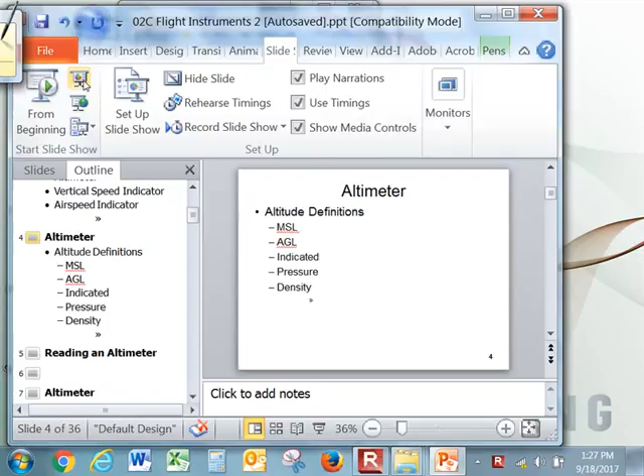Okay, this is section 02. We're on 02. Flight instruments. Is this part 3? Well, the first day it was like 1 minute, right? Right. All right, so it's either part 2 or 3.

All right, let's talk about reading an altimeter. There are up to 3 needles on an altimeter.

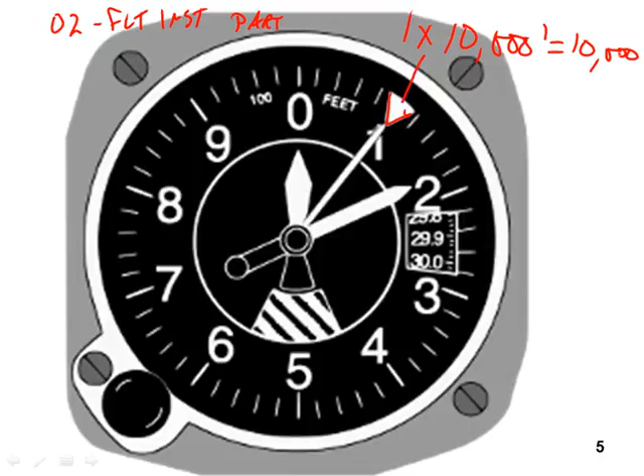First, this one right here is pointing to every 10,000 feet. You'll notice it's right on the 1, so 1 times 10,000 equals 10,000 feet. That tells me that I'm pretty close to 10,000 feet.

Now, if the needle was pointing right here—0, 2, 4, 6, 8—if this triangle was right here, that would tell me I'm pretty close to 8,000 feet. But that's just an estimate.

Then this needle right here is telling me how many thousands. You notice in this case it's pointing to 0. So this triangle is pointing to 10,000, this one is pointing to 0, and then this one is pointing to 180.

So right now this altimeter is indicating 10,180. That's indicated altitude, because no matter what it shows, that's indicated altitude.

But if we had set the Kollsman window to the correct altimeter setting, what would this 10,180 also be? It would be indicated, and if this was set correctly to the correct barometric pressure, then what would this altimeter be telling us? We use that all day, every day as a pilot.

MSL. It's altitude above mean sea level.

How often are we as a pilot going to make sure that the altimeter setting in here is correct? All the time. And as we're flying along on our cross country, how often do we have to set it?

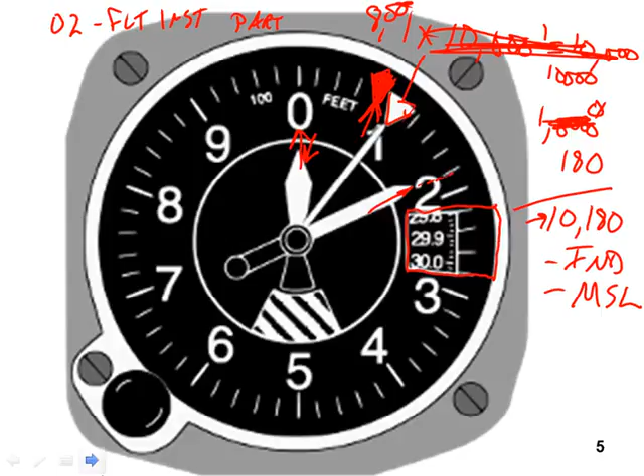You fly to Korea, South Korea, don't fly to North Korea. But if you fly to South Korea and you're coming in off the Pacific Ocean, and you call up somebody in South Korea and start speaking in Korean, they'll talk back to you in Korean. But if you talk to them in English, they'll talk to you in English.

So let's go to the next altimeter. I got another altimeter here.

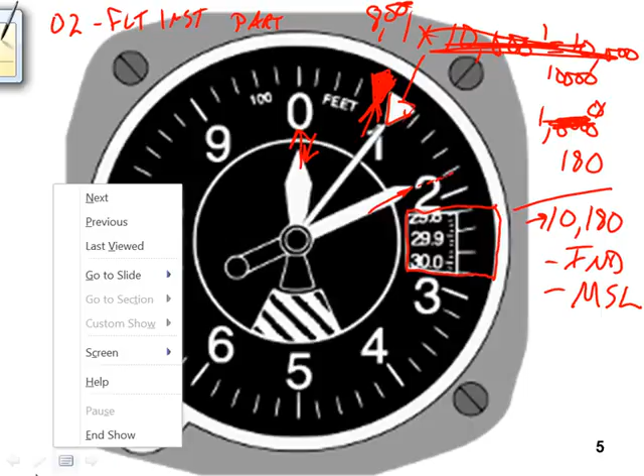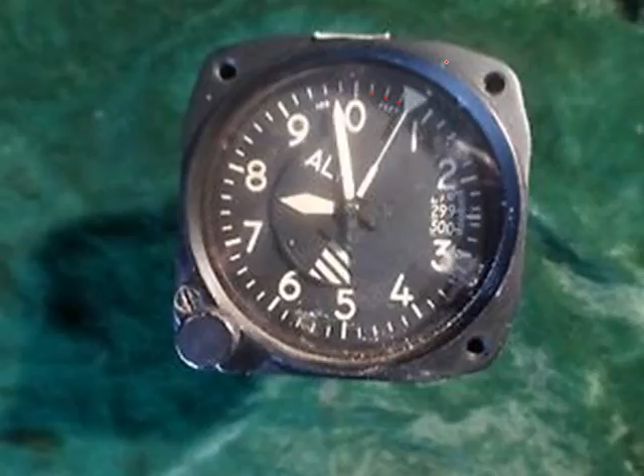So here's another altimeter. You'll notice, here's the triangle - 2, 4, 6, 8 - so that's telling me I'm at 8,000 feet. This medium sized needle is telling me it's 780-ish, almost to 800 feet. This needle right here is off just a little tiny bit. So this is 920, 40, 60, 70, 970. So this airplane's at 8,970 feet.

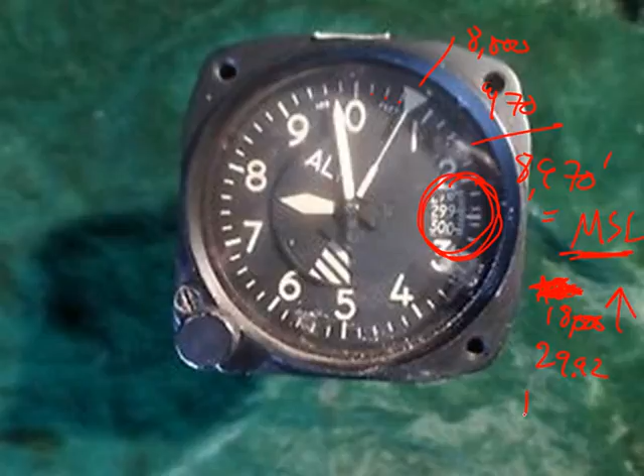And if we have the correct altimeter setting in here, this 8970 is in MSL, mean sea level. So you're going to fly around all day, every day, with one of two altimeter settings. Either you're going to have this set for the correct barometric pressure, and it'll be MSL, or if you're at 18,000 feet or above, you set in 2992, and you're flying a pressure altitude. But everybody else is flying the same pressure altitude - you just might not have your true altitude above sea level anymore.

If you're a jet airplane - we're not going to get into it much in this class - your fuel economy is way, way better above 30,000 feet. There's less air, so there's less drag, so you can go faster for the same amount of fuel you burn. That's why jets don't fly along at 5, 10, or 20,000 feet. They go up past 30. 35,000 is a pretty sweet number. It varies on which jet it is and how heavy you are.

As you burn off a lot of fuel, let's say you take off from Los Angeles, flying to Hawaii. You may take off and your best altitude may be 32,000 feet. It's 5 hours to get to Hawaii, and you're going to burn a lot of fuel. By the time you get to Hawaii, you'll have done step climbs, and you're probably at 35, 36, 37, 38,000 feet by the time you get there. Because every time you notice in your chart that you have a better fuel burn 1,000 feet higher, you call up the air traffic controller and tell them you want another 1,000 feet, and if nobody's up there, they'll give it to you.

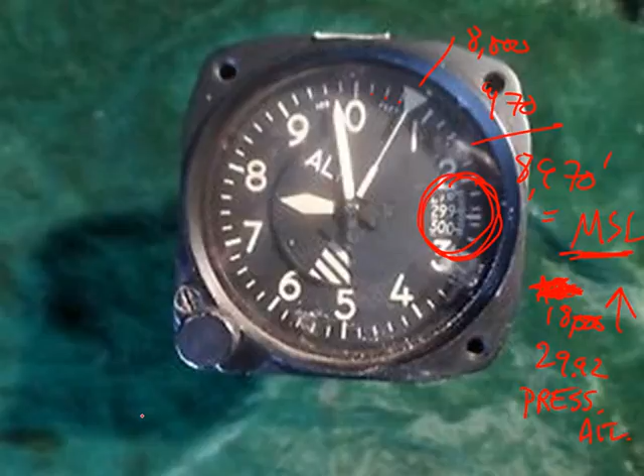But everybody going in that direction is doing the same thing anyway, so everybody knows that's what you're going to ask for. And then at the last minute, you pull the throttles to idle, and you go, woohoo, and then descend. I mean, in the cockpit, you say woohoo. Don't say that - the passengers don't like it when the pilots are saying woohoo. I mean, I don't think they are.

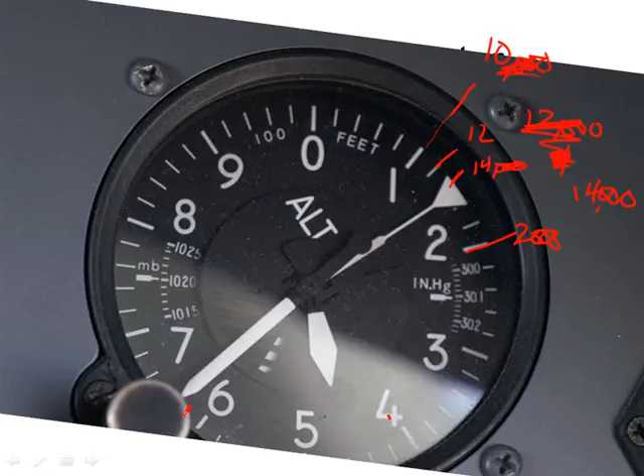This right here is 20,000. So this is 12, and this line right there is 14,000. So I'm going to be at least 14,000, and sure enough, here's the 4, there's the 5 - I'm going to be between 14,000 and 15,000. And this needle is how many hundreds? 1, 2, 3, 4, 5, 6. It's hard to see - there's about 620. We'll say that's about 630.

Again, you notice, look at this case - the altimeter is not set to 2992. You'll set it's at 30. This line right here is at 30.10, but it's really at the next line, so that's actually at 30.12.

Again, I'm not going to try to worry about figuring this out, because when you're in the airplane, you're going to actually spin this knob right here, and this number is going to go up or down. And you'll notice, just for fun, that it says inches of mercury, IN period HG, inches of mercury.

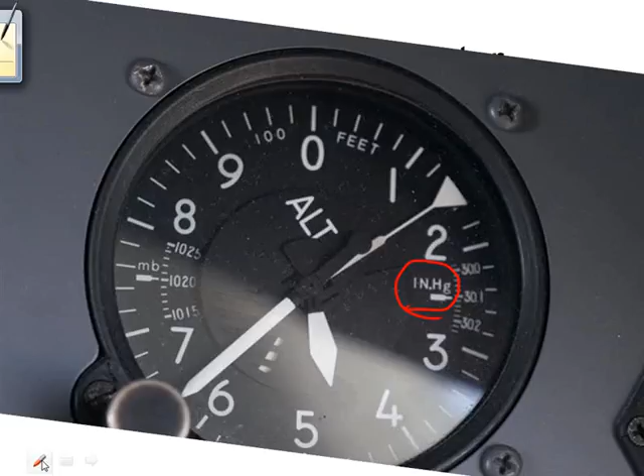Okay, so we played with reading an altimeter.

All right, so next we're going to go into the principle of operation. I'll show you here in a picture: there are some wafers. When I say wafer, this is really just a sealed container made out of brass or bronze, sealed, with 29.92 inches of mercury in it. Whenever you change the pressure on that, it's actually maybe a bellows is a better way to describe it instead of a wafer. Maybe if I show you a picture.

The Kollsman window, that's that window with the inches of mercury that you're setting. There's two L's in Kollsman. It's not Coleman like the camping stove company, C-O-L-E-M-A-N. You don't have to spell that for the test. Kollsman window, I'll have to look it up. I'm guessing it was named after some human.

All right, so the altimeter works off of one pressure, and that's static, off of the side of the airplane. So the only pressure it uses is just one, the static pressure, and that's the outside air pressure.

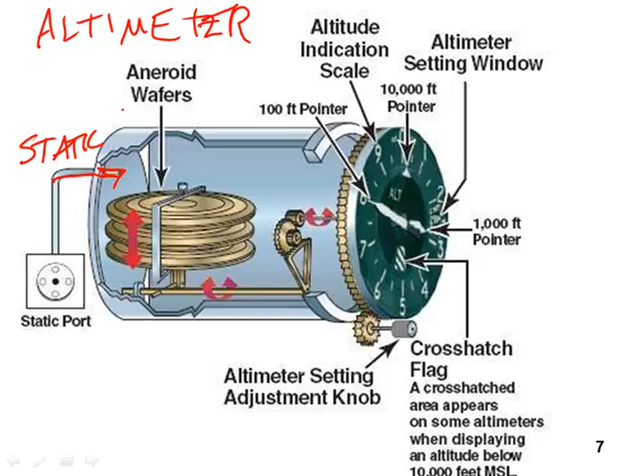So if it was a standard day and the pressure at sea level was 29.92, and you cranked in 29.92 in the Kollsman window with this knob right here, and the outside air pressure at sea level was 29.92, then this altimeter would read 0.

So we'll get back to that shortly. So the air comes in here, but inside these wafers right in here, these are all sealed, there's no holes in them. If the pressure in here gets less, then these are going to try to expand, and it's going to push up. This shaft here is going to rotate. This will move over, it'll spin these gears, spin those gears, spin those gears, and spin all these things.

So I'm never going to ask you to draw this picture. What I am going to ask you to tell me is that inside of the altimeter... oh, okay, Brian's thinking he wants to be able to draw that picture. Okay, bring in colored pencils or crayons. You got to do this in crayon on the test, with all the same colors here. Okay, I guess I could let you use felt markers.

The air inside of these wafers, inside of these discs, inside of these bellows, it's sealed in there. So you got to understand the case, this round cylinder, it's usually painted black, that is this altimeter. Air can't get in or get out of it except to that little tiny hole on the back that goes to the static port. It's not the air pressure inside of the airplane, it's the air pressure inside of the static port from the outside of the airplane.

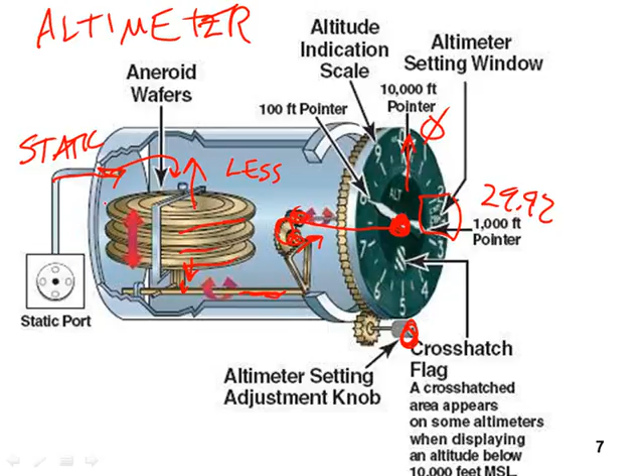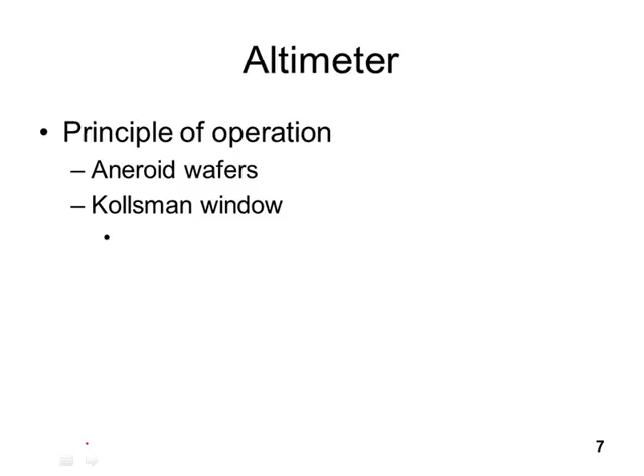There are two factors that make you wish to remember this saying: from high to low, look out below. One is temperature and one is pressure. I'd write pressure first because pressure is the one that's going to get you most of the time.

You have to understand that although 29.92 is standard day pressure at sea level, most days are not standard. Even though the standard temperature lapse rate is 2 degrees Celsius for every 1,000 feet you go up, that's just on a standard day, probably not today. Same thing with the standard pressure lapse rate: 1,000 feet gives you 1 inch of mercury less pressure up to about 15,000 feet, but that's on a standard day. Every day is a little bit different, so that's why you got to keep setting your altimeter.

Let's say I'm flying from Sacramento to Bakersfield, and there's a low pressure area over Bakersfield. Think about the last time you saw a TV weather forecast, sometimes they have L's and sometimes they have H's. This would be a good time to start watching the local news and the weather. It'll help things sink in when we get to weather.

A low pressure area, that big giant L they put on the screen, means the pressure is lower than 29.92. Really it means it's lower than somewhere else, but for today we'll just say it's less than 29.92. So let's say there's a low pressure area over Bakersfield, and a high pressure area over Sacramento.

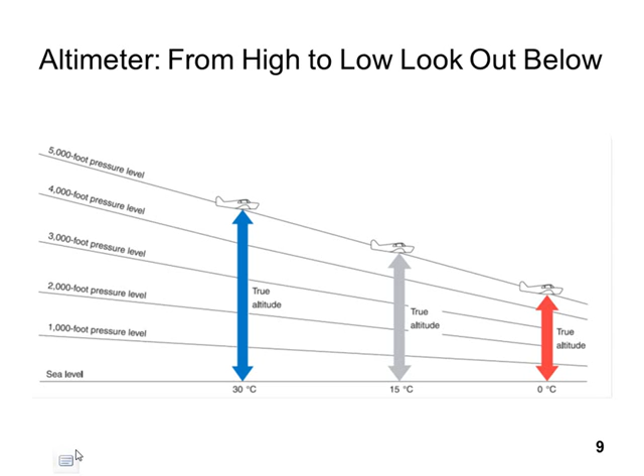So that's why you need to keep resetting your altimeter: if you fly somewhere, you may end up being lower than you think you are. And I'm not going to go through those pictures.

All right, next gauge we're going to talk about is the vertical speed indicator, or sometimes abbreviated VSI, vertical speed indicator.

Here's a picture of a typical vertical speed indicator. It's one of those 6 instruments - so far all we're talking about are these 6 instruments, the 6-pack. You notice right now, it doesn't say anywhere on here - there it does. It says 1,000 feet per minute is that line right there.

So this is really 500 feet per minute, this is really 1,000 feet per minute, and this is really 1,500 feet per minute. So right here, this needle pointing at 0, that's what it ought to read on the ground. That's what you're going to do on the ground to check it - make sure it reads really close to 0.

You'll notice what looks like a little screw down here with a little line in it. That's actually one of the few things that you as a pilot could operate. You could stick your fingernail in there and turn it if you needed to get this needle to go to 0, but usually it gets caught on the last inspection, and the mechanic will rotate that screw and get it to 0.

If it's off a little tiny bit, you don't have to turn the screw. You just say, it's reading 30 feet descending even though I'm not, so you'd have to make that 30 feet per minute correction. But 30 feet's typically not enough to worry about.

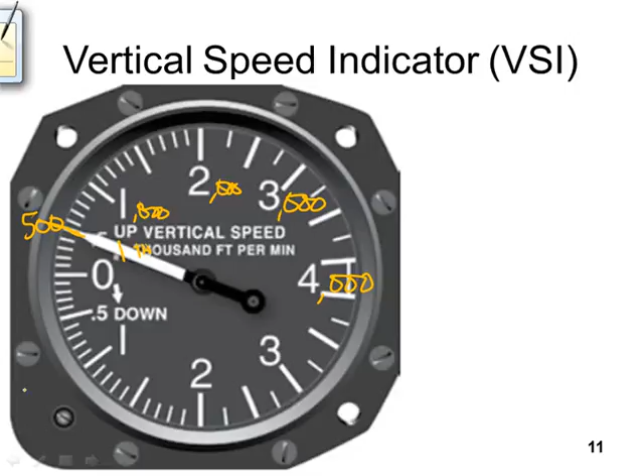You mean like a jet?

Okay, if you get in let's just say it's one of the 50-seaters, the question is, how fast do commercial airliners climb? Between 2 and 10,000 feet per minute. If you got in a Canadair regional jet or an Embraer regional jet, an ERJ, flying out of Fresno, the 50-seaters that fly out of Fresno, they're probably going to climb at between 3,000 to 6,000 feet per minute. And if an engine quits, you're still going to be climbing pretty good.

I actually asked a student of mine whose parent flew a Boeing 777, which is a very large, it's the biggest twin-engine airplane flying out there. What does it weigh, like 500,000 pounds? It weighs like 500,000 pounds. I asked him if you loaded it up completely and took off on a standard day at Los Angeles International at sea level, 11 feet above it, and you took off and put the flaps up and put the landing gear up, and immediately one engine quit, how fast would it continue to climb? He said it'll still climb at 1,000 feet per minute with half of the engines inoperative.

I'm not even used to flying an airplane that'll fly 1,000 feet per minute if all the engines are working.

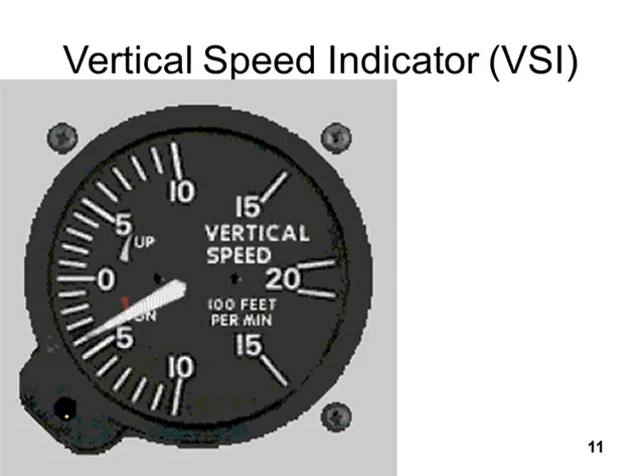So if you're climbing 3,300 feet per minute, and let's just say you could maintain it, how many minutes will it take you to get to 33,000 feet? I know it's tough, get out your calculator if you need to. You're climbing at 3,300 feet per minute. How many minutes will it take to get to 33,000 feet? Well, I come up with 10 minutes.

So you're cooking. Woo-hoo-hoo. I've flown a little 4-seater with a 150 horsepower engine, and it's taken me 20 minutes to get to 10,000 feet. Well, hey, 500 feet per minute, it's going to take me 2 minutes for every 1,000. 2 minutes for every 1,000 to get to 10,000 feet is 20 minutes. But the airplane I'm used to flying around in, the higher you go, the less horsepower there is. So the higher you climb, it doesn't stay at 500 feet. It goes down to 400, then 300. I've been in a climb at 200 feet per minute. It's like, okay, it's going to be 5 minutes just to get to another 1,000 feet.

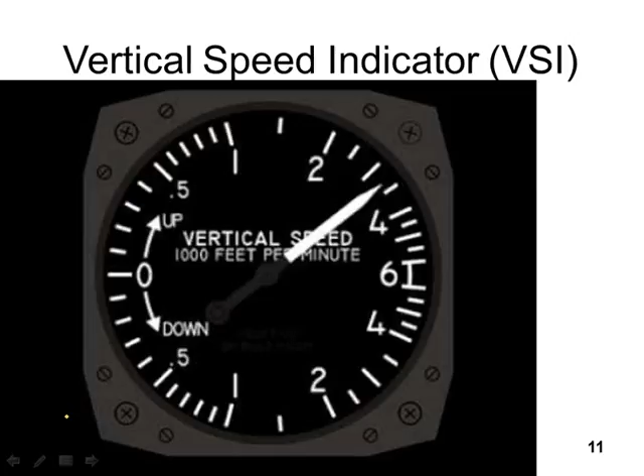All right, so metered orifice. A metered orifice means that there is a hole, and that's what orifice means. Has anybody ever heard of that word, orifice? Okay, some of you have heard of the word orifice, and some of you have not. Metered means that it is a particular size, it was measured. So it's not just a random size hole, it's a particular size hole. And what that's going to do is it's going to give the vertical speed indicator a calibrated leak. I'm going to show you the insides and tell you what I mean here in a second.

Oh, you can go ahead and write that in there. The static pressure from the static system goes directly to the inside of a diaphragm.

See how many more words I have before we get to the picture? All right, I'm going to let you write down 'measures rate of change,' then I'll show you the picture, I don't care how many words come after that. Because really that's what the vertical speed is doing, telling you the rate of change. How fast are you changing altitude? Are you changing it at 300 feet per minute? Are you changing it at 3,000 feet per minute?

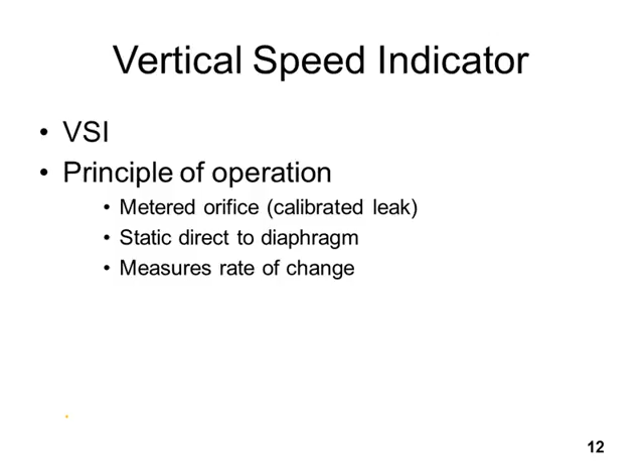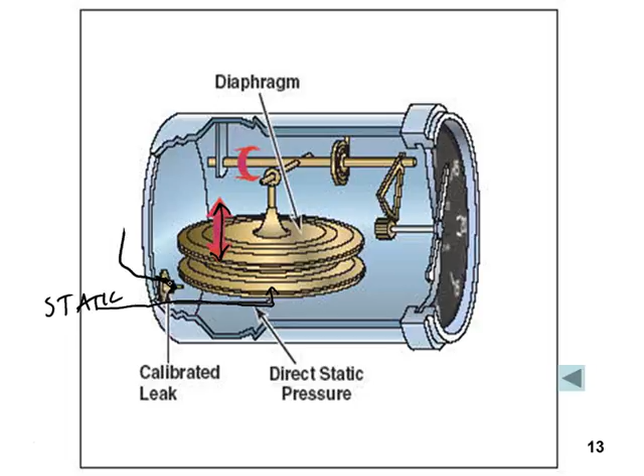Yay, finally, the picture. All right, so this doesn't do a very good job of showing it, but static pressure goes into this diaphragm, and this diaphragm, you notice with this arrow, can expand and contract. But there's also this little tiny hole right there, and that's the metered orifice.

So if you climb up in altitude, let's just say for fun you're going up, this static pressure over here is going to get less. Remember, as you go up in altitude, there's less pressure. But at the same time, if the pressure gets less, and the pressure on the inside of this case stayed the same, but the pressure inside here got less, what would happen to this diaphragm? Would it contract or would it expand? It would contract, that is correct.

So that would push in here and it would push in there and it would make all this mechanism work, and the needle would show a climb. However, you'll notice there's a little tiny hole right here, that metered orifice, and air can get out. If you didn't let that air out, you'd climb a little bit and then level off, but the needle would stay stuck at 300 feet per minute. So once you've climbed, you have to let the pressure equalize and let the needle come back to zero.

So if you descend, this will all go backwards. Again, once you stop descending, well, let's go back to climbing. Let's say you climb from 0 feet to 500 feet and you level off at 500 feet. There's still a pressure difference compared to where you used to be, but now what you really need is for the needle to go back to zero because you leveled off. You're not climbing and you're not descending. So after you level off, air is going to leak out this metered orifice, and the bellows will expand back to where they were, and the needle will point to zero again.

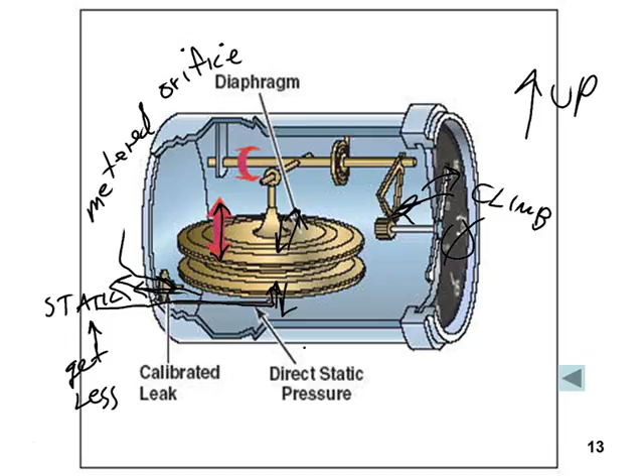All right, already talked about the lag, and that's good enough. We already covered the fact that there's a lag.

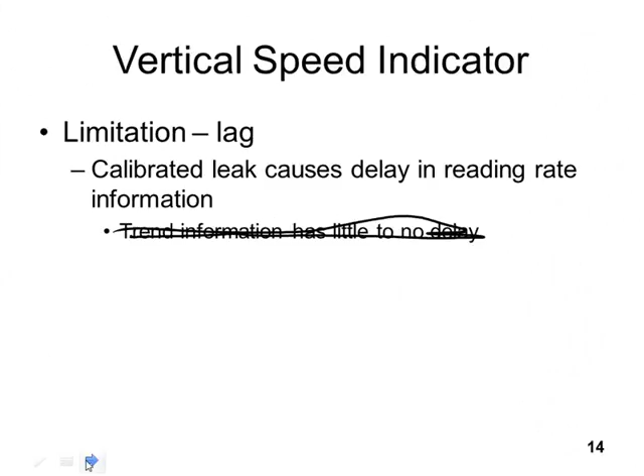All right, airspeed indicator. There's 5 different altitudes. There's 4 different airspeeds.

The good news is that the indicated one is really, really easy. It's just like the altimeter. If you look at an altimeter, no matter how well you set the Kollsman window, whatever altitude it reads, that's the indicated altitude. Same thing with an airspeed indicator. No matter what, if you look at the indicator, that's your indicated airspeed.

And here's the other good news. The vast majority of the time when you're flying that airplane, all you care about is the indicated airspeed. When you're trying to decide how fast do I have to go down the runway before I pull back on the stick or pull back on the control wheel to lift it up, that's called rotation speed. You look at the airspeed and you do it based on indicated airspeed. When you're climbing out and you want to clear obstacles, that's VX, that's best angle. You apply an indicated airspeed. If you want to climb as fast as you can, that's VY, best rate of climb.

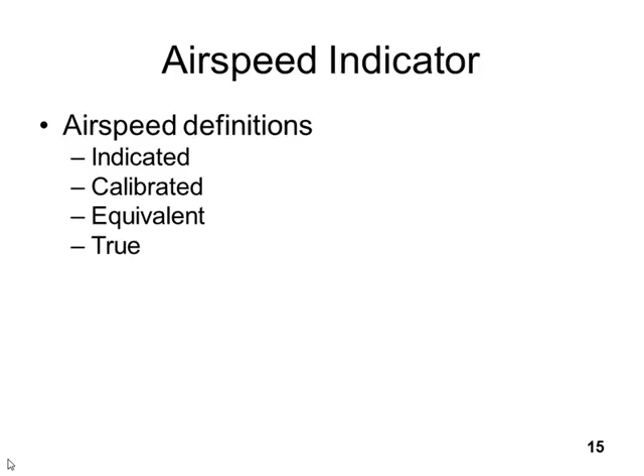You know what? I think that's enough. Well, I want to look at a picture just to start giving you an idea here. So here's a diagram of an airspeed indicator.

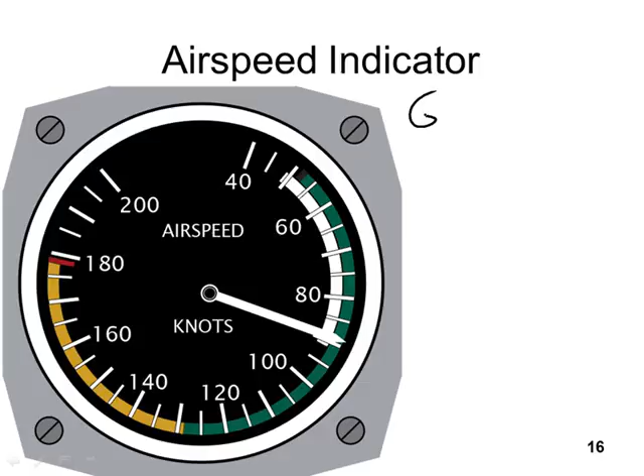I know we're going over time. We've got green and yellow and red. And pretty much generally, green is normal, yellow is caution, and red is nuh-uh. What's that? No, because in this case, there's only one red, and that's at just under 180, and you'll never get that speed. You'll go off the end of the runway. So green is normal, yellow is caution, and red is never, never exceed.

And these color codes that I'm talking about here don't just apply to airspeed indicators. They apply to the oil pressure gauge and the oil temperature gauge. How hot can the oil get? There's a red line. What's the best oil pressure? There's a green arc. In this case, you notice there is a green arc.

It goes from, let's see, let's look at the green arc here. The green arc is starting right around here. Let's see if that's 40, 60, that's 50. If that's 50, that's 55. I'm going to say that that's 53. It's hard to read, but I'll say 53, and it goes all the way to right here, which is 120, 130, 125 to 130. I'm going to call this 128. So this green arc right here goes from 53 knots indicated airspeed all the way to 128 knots indicated airspeed.

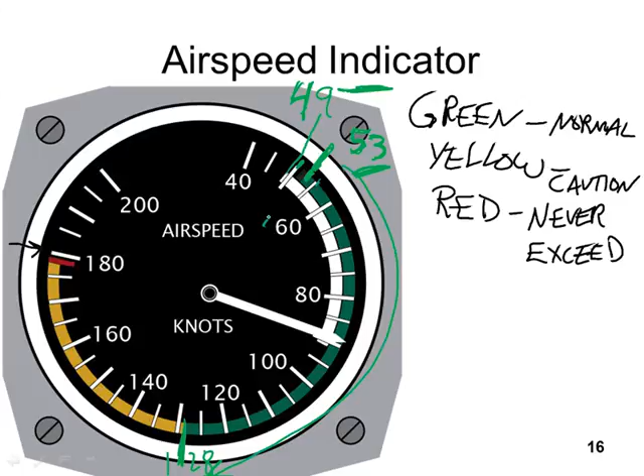This white arc is the normal operation of the flaps, and the bottom end of it is 4 knots slower than the green arc. If you go to full flaps, where will the airplane stall? If you have retractable landing gear extended too, that's the airspeed the airplane will stall at if everything is hanging out and dirty, creating drag. The flaps are creating lift, which is why you can fly 4 knots slower.

So generally, if this was the airplane you were flying, and you didn't have any flaps in, and you were close to the airport slowing down to land, you're probably going to fly at around 70 knots. This 70 knots may be your normal slow speed—there's no official term for that, but the point is you have a lot of airspeed before you're going to stall the airplane.

And then if you go to full flaps, you can probably fly around at 65 knots, and look at how much room you've got until the airplane stalls. This is what's really nice, and I want to be careful about this—part of what you do as a pilot is to do things safely and with a margin of error, so you can make a small mistake and everything is still fine.